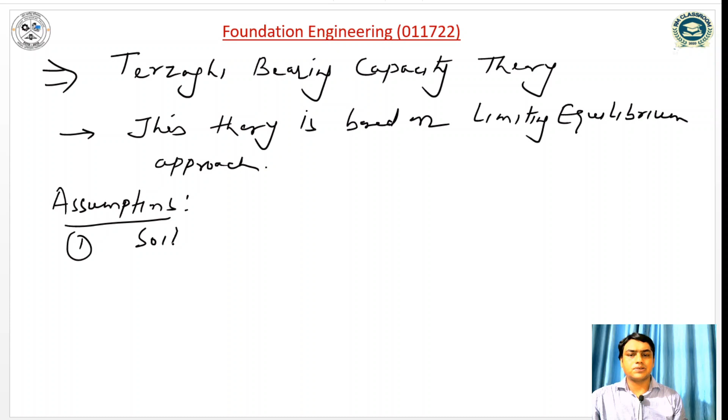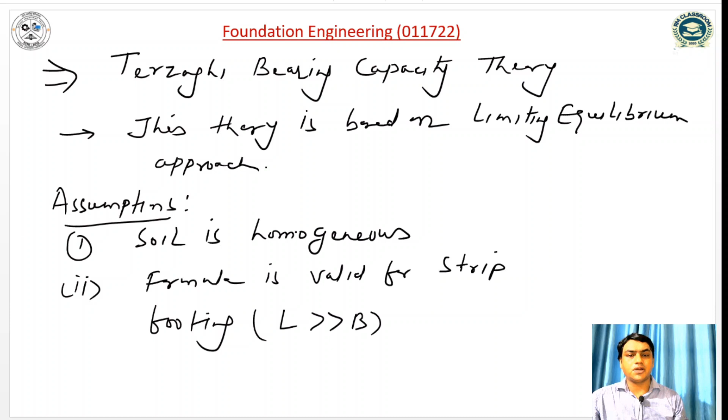The first assumption is soil is homogeneous. Second one is the formula is valid for strip footing. So what is strip footing? The footing in which the length of the footing is much greater than the width of the footing. Such type of footing is called strip footing, and Terzaghi has taken the strip footing.

The third assumption taken by Terzaghi is that the footing is shallow and general shear failure. Fourth one is loading is vertical and symmetric.

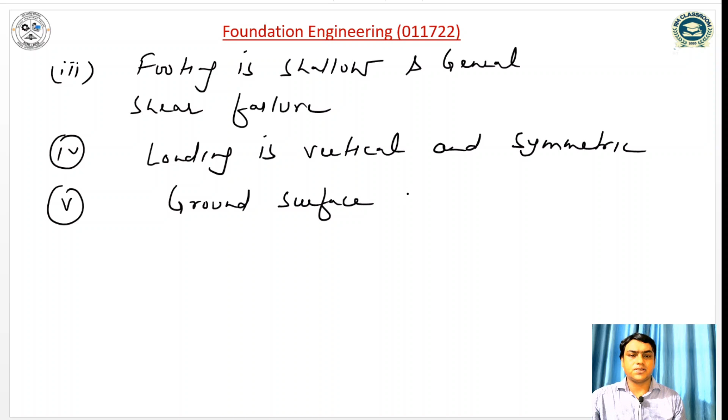Fifth one is ground surface is horizontal. Sixth one is shear strength is governed by Mohr-Coulomb criteria. So these are the assumptions taken by Terzaghi.

Soil is homogeneous. Formula is valid for strip footing. Footing is shallow and general shear failure. Loading is vertical and symmetric. Ground surface is horizontal. And shear strength is governed by Mohr-Coulomb criteria.

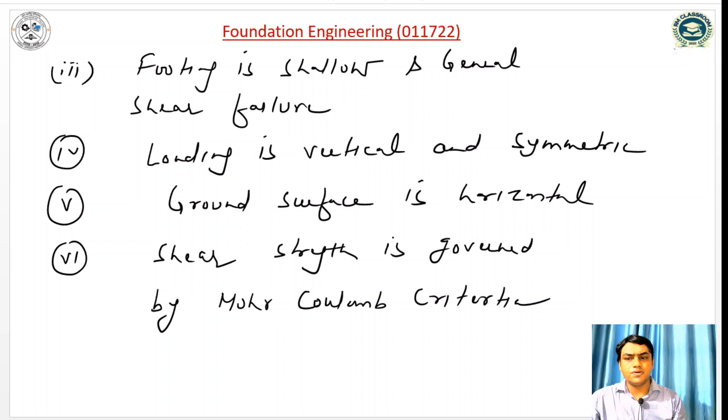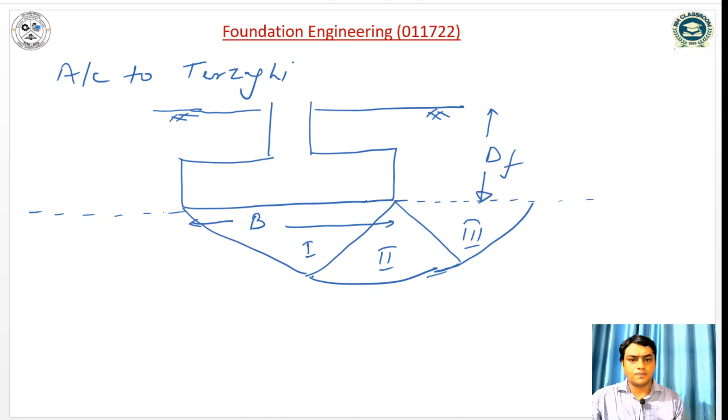According to Terzaghi, this is the footing he has taken. This is the width of footing, this is the depth of footing. And below the footing there are three zones: zone first, zone second, and zone third. This angle is 45 minus phi by 2.

This is called the log spiral curve. So what are these zones? Zone first is called the zone of elastic equilibrium. Zone second is the radial shear zone, and zone third is known as the Rankine passive zone.

So according to Terzaghi, the ultimate bearing capacity Qu is equal to C Nc plus Q Nq plus 0.5 B gamma N gamma. So this is the expression of ultimate bearing capacity, and remember this formula is valid for strip footing only.

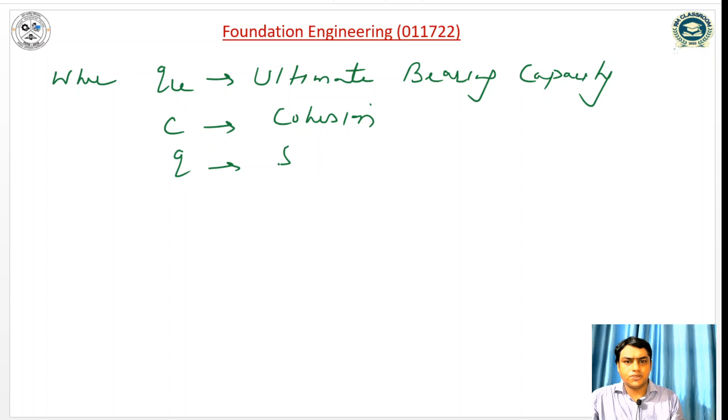Where Qu is the ultimate bearing capacity, C is the cohesion, Q is the surcharge, gamma is the density, B is the width of footing, and Df is the depth of footing.

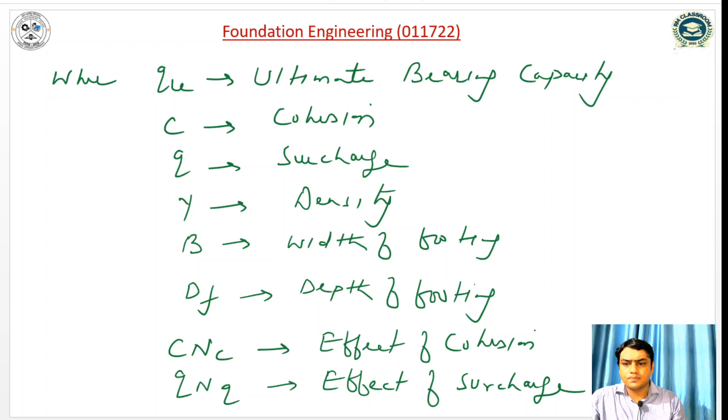The entire term C Nc is the effect of cohesion. Q Nq is the effect of surcharge. And 0.5 B gamma N gamma is the effect of soil weight. So if I look at the ultimate bearing capacity equation: C Nc is the effect of cohesion, Q Nq is the effect of surcharge, and 0.5 B gamma N gamma is the effect of soil weight.

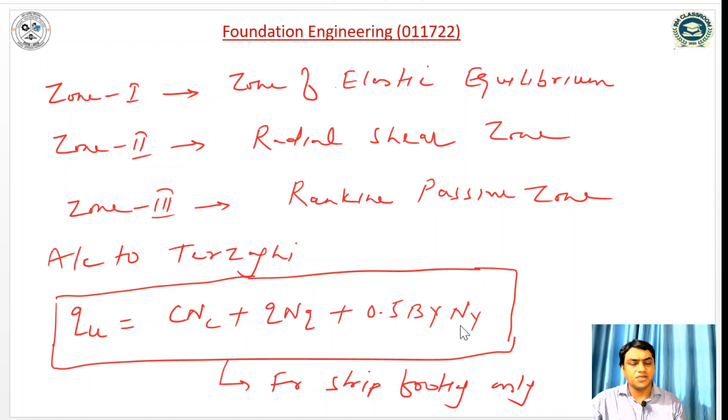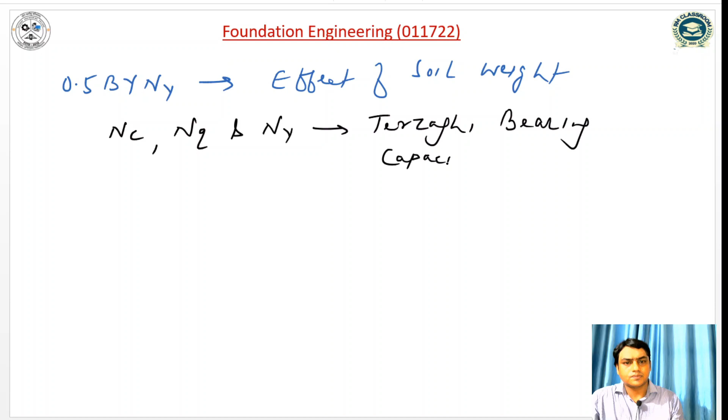Here Nc, Nq and N gamma are the Terzaghi bearing capacity factors, and bearing capacity factor depends only on the angle of internal friction phi. With increase in phi, Nc, Nq and N gamma will increase.

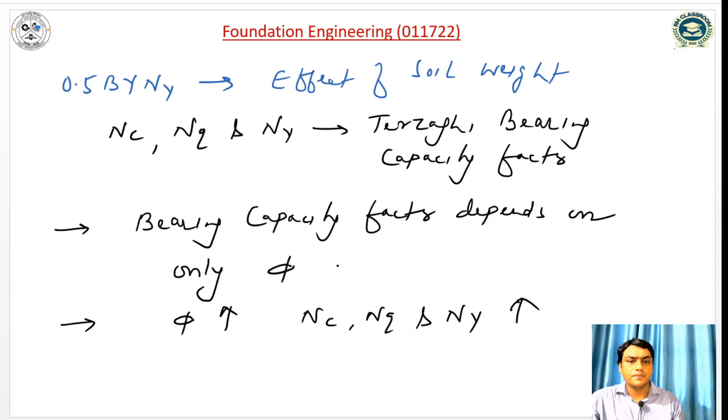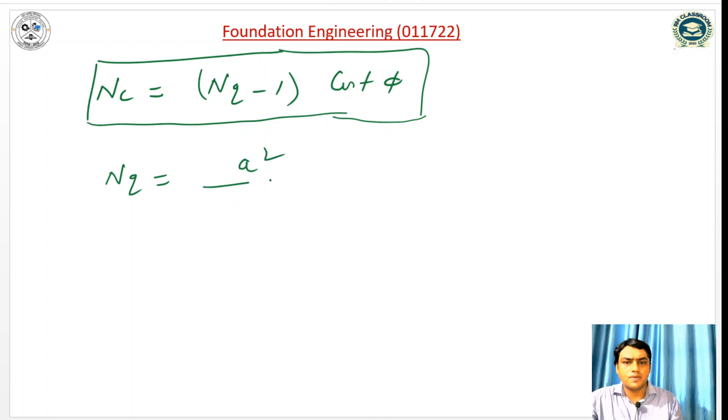So what is the expression for Nc, Nq, N gamma? Nc is equal to Nq minus 1 into cot phi. This is the relation between bearing capacity factor Nc and Nq. Nq can be written as A square divided by 2 cos square of 45 plus phi by 2, where A is equal to e to the power 3 pi by 4 minus phi by 2 into tan phi, and N gamma can be written as 1 by 2 tan phi into Kp gamma divided by cos square phi, minus 1.

So this is the expression of N gamma, where Kp gamma is the passive earth pressure coefficient. This Nc is also called the bearing capacity factor for cohesion, Nq is the bearing capacity factor for surcharge, and N gamma is the bearing capacity factor for density. So Nc can also be written as bearing capacity factor for cohesion.

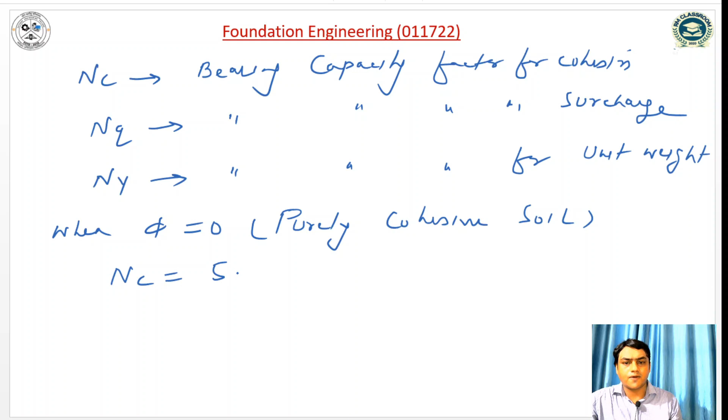NQ is the bearing capacity factor for surcharge, and N gamma is the bearing capacity factor for unit weight. We have already told that this bearing capacity factor depends only on the angle of internal friction. When phi is equal to 0, meaning purely cohesive soil, the value of NC is 5.7, the value of NQ is equal to 1, and the value of N gamma is equal to 0, for phi equal to 0.

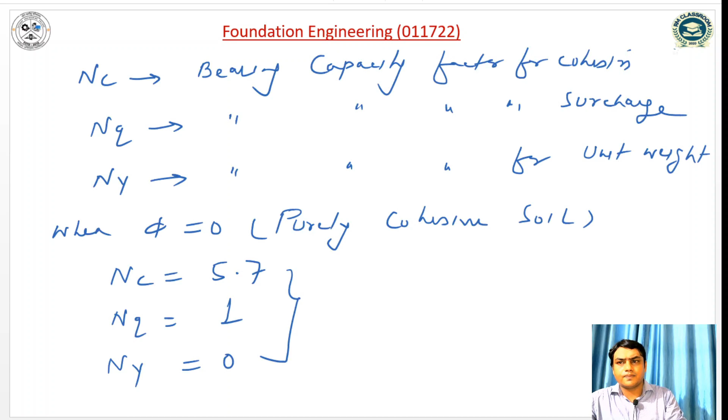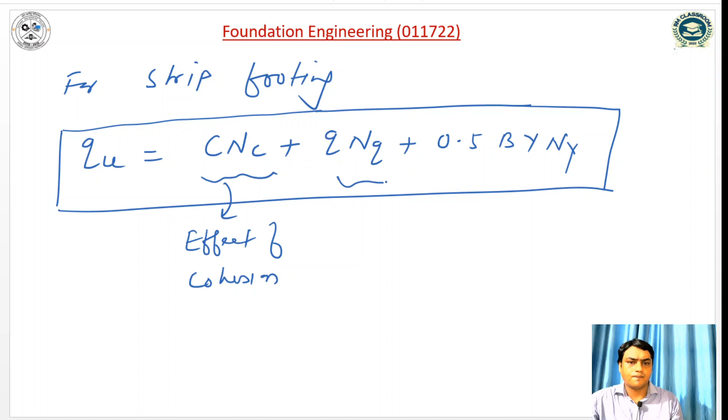So for strip footing, the ultimate bearing capacity derived by Terzaghi is CNC plus QNQ plus 0.5 B gamma N gamma. This is the ultimate bearing capacity equation. As I told you, this is the effect of cohesion, this is the effect of surcharge, and this is the effect of soil weight. These are called the first term, second term and third term.

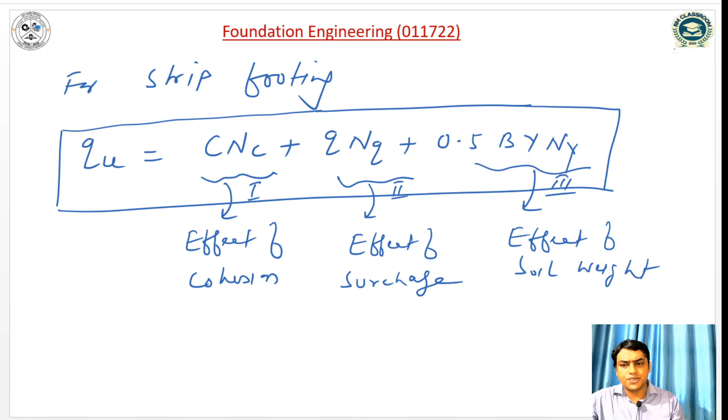So if I write the net ultimate bearing capacity equation for the strip footing, net ultimate bearing capacity is denoted by QNU. We have already discussed that net ultimate bearing capacity is equal to QU minus gamma into dF. So QNU can be written as CNC plus QNQ plus 0.5 B gamma N gamma minus gamma into dF. So we can write it as CNC plus QNQ minus gamma into dF, plus 0.5 B gamma N gamma.

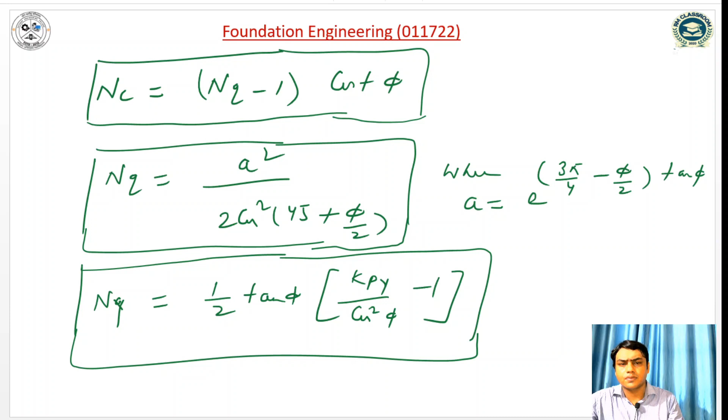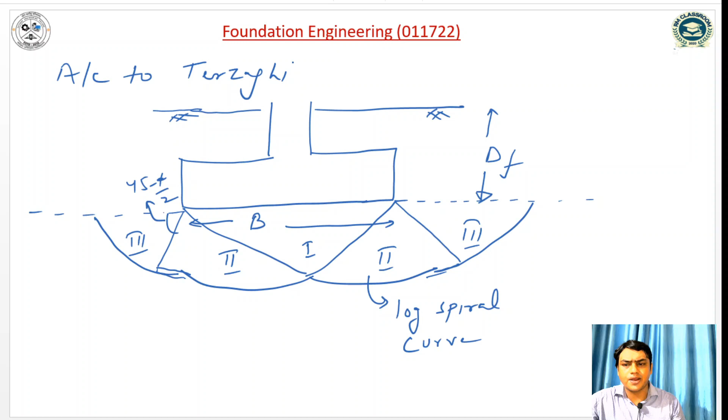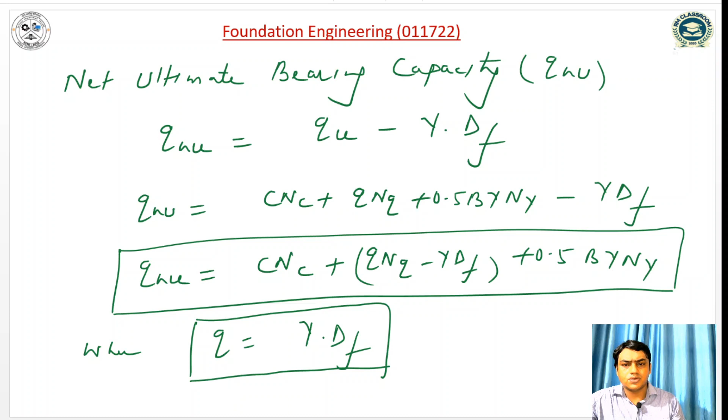Now if I talk about the surcharge, so if this is the footing, what will be the surcharge acting on this at the base? It is gamma into dF. So the value of Q we can write, where Q is equal to gamma into dF. So if I take gamma dF common, it becomes NQ minus 1. So the surcharge effect is gamma into dF. This is about the net ultimate bearing capacity.

Similarly, net safe bearing capacity, if the factor of safety is given, net safe bearing capacity can be written as net ultimate divided by factor of safety. And net ultimate is CNC plus Q into NQ minus 1 plus 0.5 B gamma N gamma, divided by factor of safety. Similarly, we can compute the safe bearing capacity, that is QS, and we can write it as QNS plus gamma into dF. So all this formula is for the strip footing.

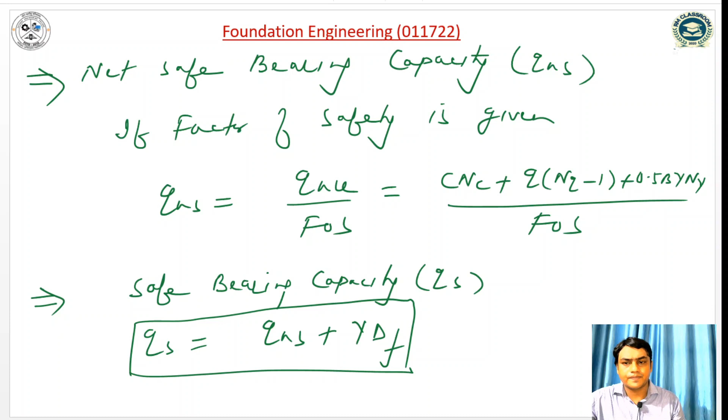So dear student, today I have discussed the Terzaghi bearing capacity theory, and in Terzaghi bearing capacity theory we have seen the various assumptions taken by Terzaghi to derive the expression of ultimate bearing capacity for the strip footing. The expression was QU is equal to CNC plus QNQ plus 0.5 B gamma N gamma, where CNC comes due to the effect of cohesion, QNQ comes due to the effect of surcharge, and 0.5 B gamma N gamma comes due to the effect of soil weight, where C is the cohesion, B is the width of the footing, and gamma is the density.

NC, NQ and N gamma are the bearing capacity factors for cohesion, surcharge and density respectively, and this bearing capacity factor depends only on the angle of internal friction. After that we have seen the expression of NC, NQ and N gamma, and I have derived and written the value of NC, NQ and N gamma for phi equal to 0, meaning for purely cohesive soil: the bearing capacity factor for cohesion is 5.7, the bearing capacity factor for surcharge is unity, and the bearing capacity factor for unit weight is 0.